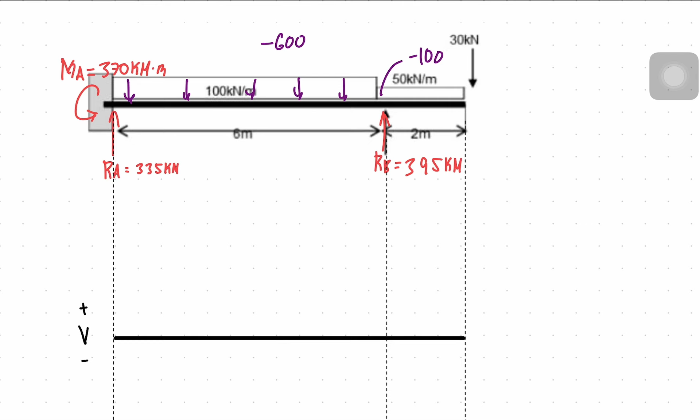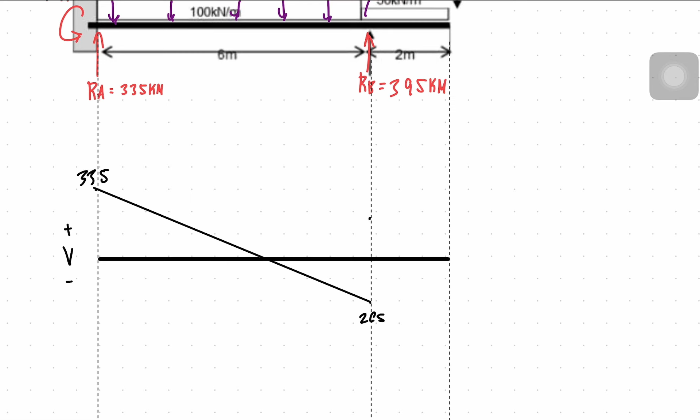335. Okay. Tapos, may distributed load tayo na negative 600. So, 335 minus 600, 265. 265. Okay. Plus 395, diba? Plus 395. So, 130. Tapos, minus 100. So, 30.

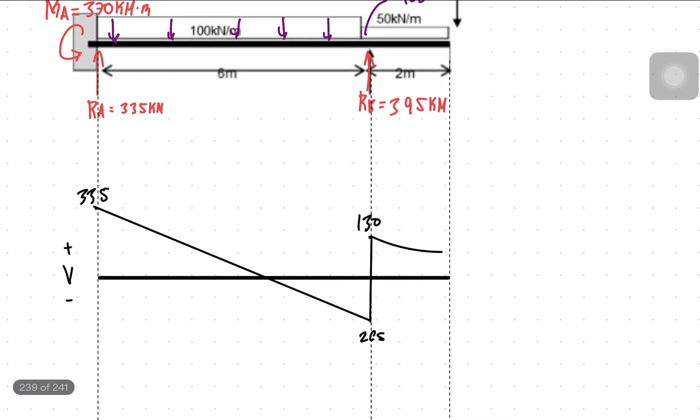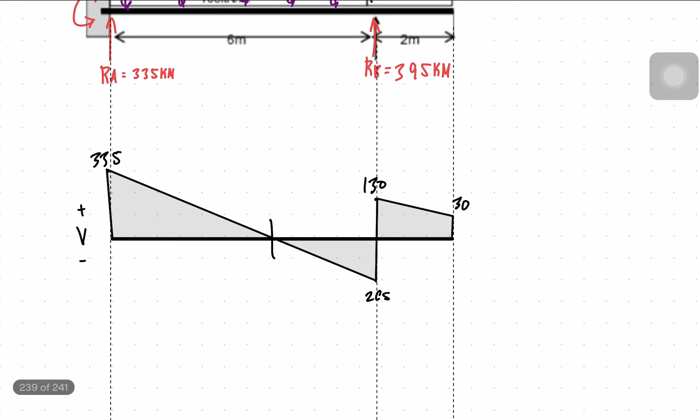So, ngayon, kailangan kasi natin yung distance nito. Okay. So, para makuha yan, ratio and proportion. So, gawin nating x to. So, kung x yan, magiging 6 minus x to. Okay. So, x over 335 is equals to 6 minus x over 265. Okay, ratio and proportion. X, partner niya, 335. Ang 6 minus x, partner niya, 265. Kaya naging ganito. Okay. So, ang nakuha nating x is, burahin natin to.

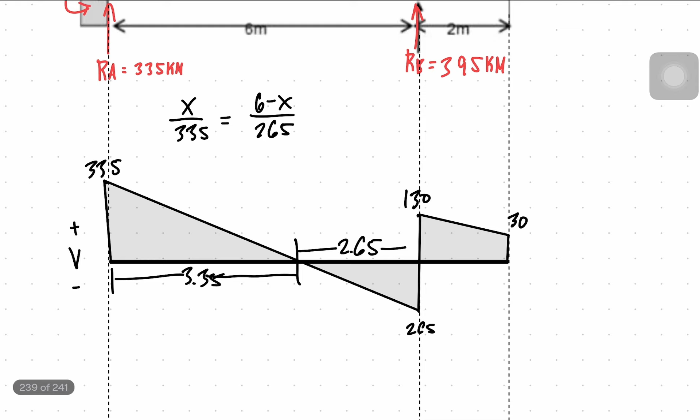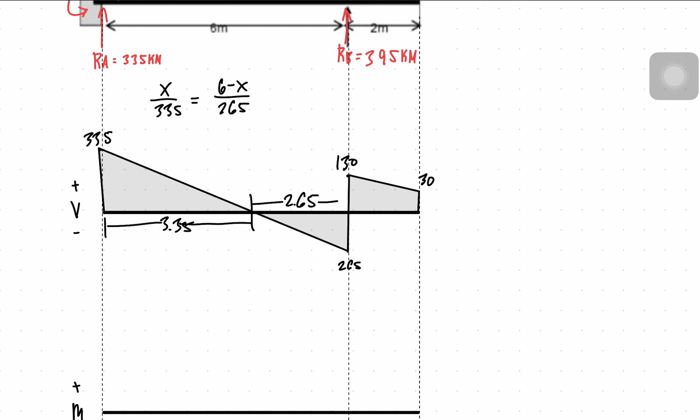3.35. Ito, 2.65. Okay. Ayan, proceed na tayo sa moment. Okay. So, bago mag-proceed dun, kunin na muna natin yung area ng mga to para mas madali. Okay. So, dahil triangle yan, 1/2 multiply by height, which is 335, multiply by base, which is 3.35. 1/2 times 335 times 3.35, 561.125.

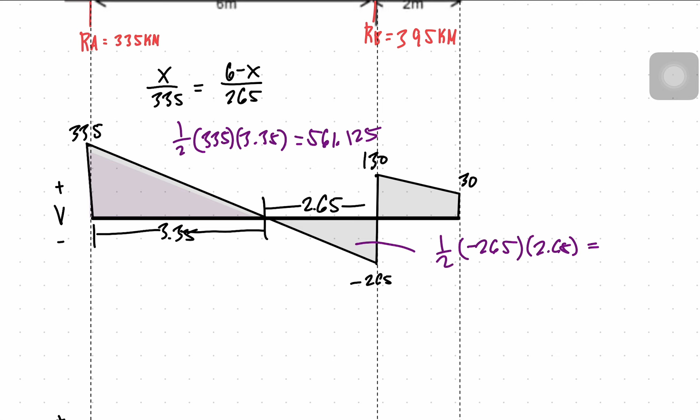So, ito naman, 1/2 multiply by height niya, which is negative 265, multiply by base, which is 2.65, equal siya sa 1/2 times negative 265 times 2.65, negative 351.125. Okay. Ito naman, trapezoid. So, 130 plus 30 over 2 multiply by 2. So, cancel lang to. So, 160.

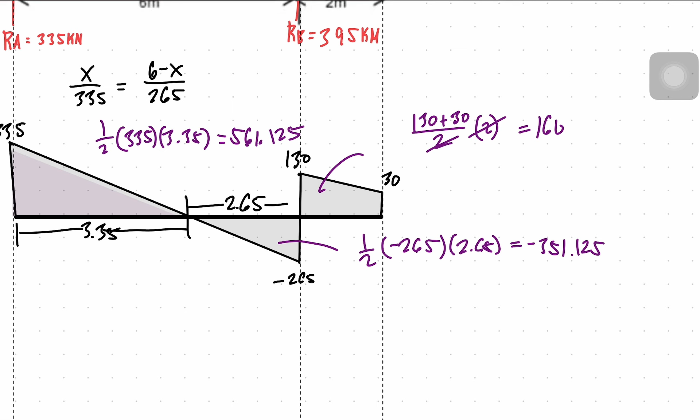Ayan. So, may mga area na tayo. So, pwede na tayong mag-start. So, nag-start siya sa moment na 370. So, 370 dito. Negative, kasi counterclockwise. Okay. So, 370 plus yung area na to. Nakuha na natin kanina, 561.125. So, negative 370 plus 561.125. Ayun, 191.125. Pero hanggang dito pa lang yan, okay?

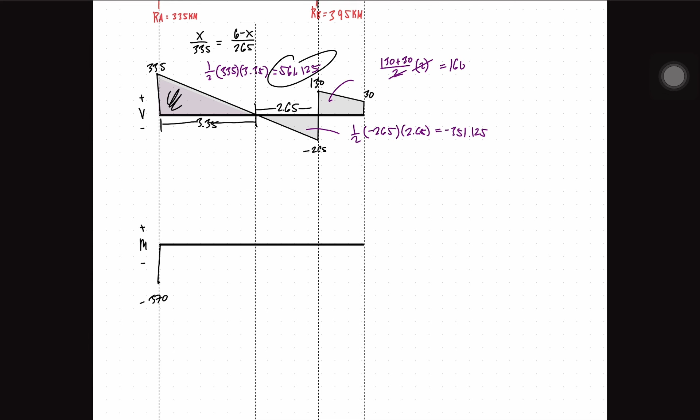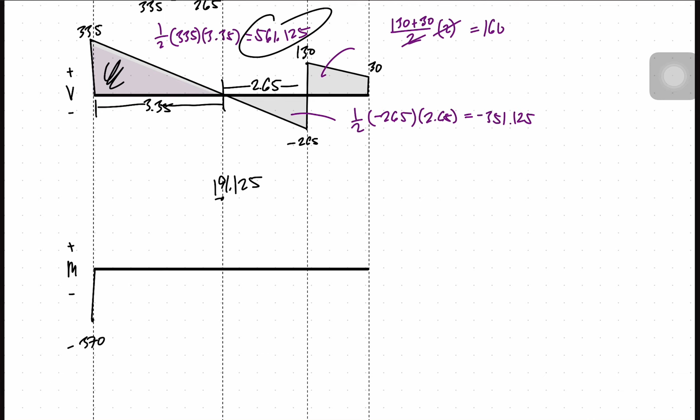I-project natin. Ayan, sa gitna. So, nandito siya. 191.125. Ayan. So, 191.125 minus area na to. So, nakuha na rin natin.

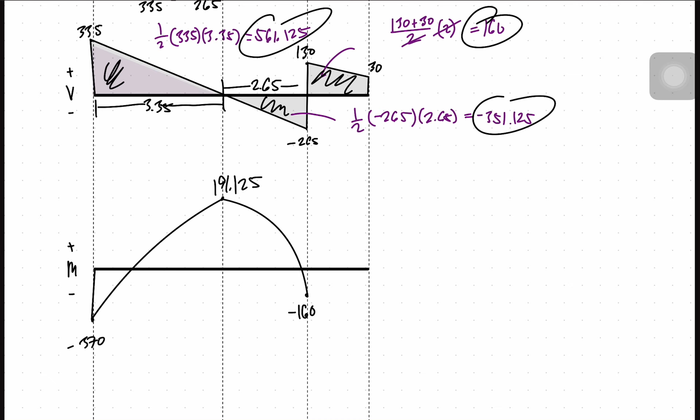Negative 351.125. So, negative 160. Okay. Tapos, add natin yung area na to, which is 160. Negative 160 plus 160, 0. So, magiging ganito na lang siya. Ayan na.